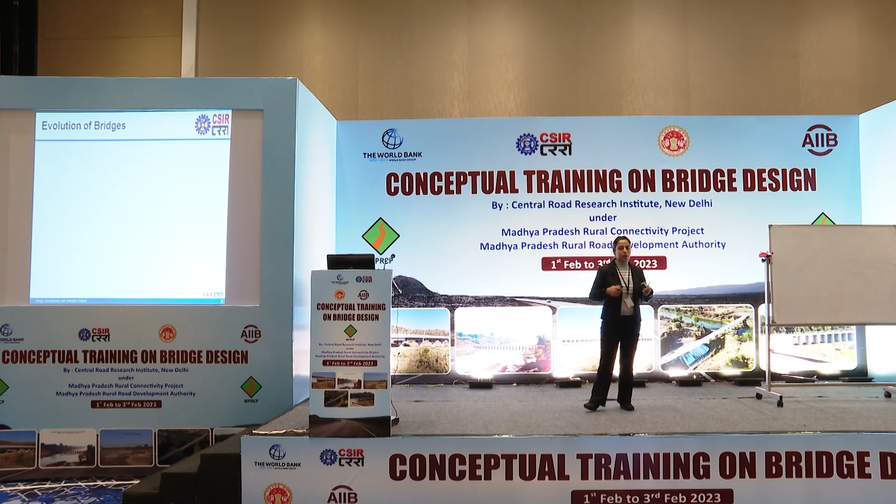So we'll keep this session very interactive so that everybody can participate, because दो reasons हैं, topic भी बहुत easy है और इसमें बहुत सारा information भी नहीं है आपको देने के लिए कि you will get bombarded with so many equations and so much of information. So we'll keep it very interactive, है ना? So anybody?

मतलब ब्रिज एज सच ब्रिज नहीं बोला जाता था, ब्रिज वर्ड ही नहीं एग्जिस्ट करता था। तो व्हाट वाज द फर्स्ट थिंग विच माइट हैव एक्साइटेड द मैनकाइंड टू बिल्ड समथिंग लाइक अ ब्रिज?

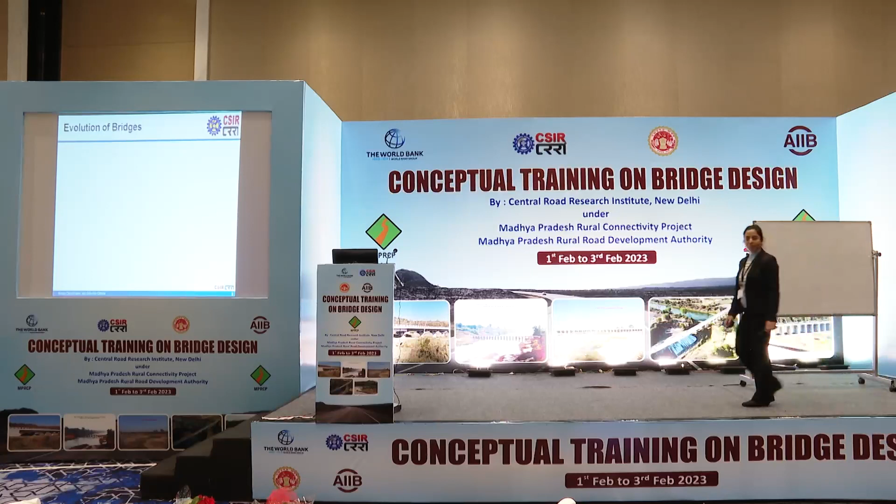हाँ, दैट इज द थिंग, बट क्या देख के उसे आइडिया आया कि ओके लेट्स मेक अ ब्रिज? क्या क्या देख के कुछ आइडिया आया कि एक ब्रिज बनाते हैं? ऐसे वाइल्ड गेस कुछ भी?

हाँ, एग्जैक्टली, सो एग्जैक्टली दैट वाज द फर्स्ट थिंग। एक ट्री, प्लैंक या कोई लकड़ी पानी के ऊपर गिर जाता है या कुछ ऑब्स्टिकल के ऊपर गिरा है और दैट माइट हैव एक्साइटेड द मैनकाइंड और मे बी just to build something like a bridge, है ना? और natural bridges, rock के bridges जो कि self made थे, naturally built थे, उन्होंने भी they might have also contributed and motivated to build something like bridges, what we call today bridges.

अच्छा, अभी एक छोटा प्लांक था और अगर हमें उसका कैरेज वे, उसका विड्थ इंक्रीज करना है तो they might have thought कि चलो ज़्यादा प्लैंक्स लगा देंगे, हमारा कैरेज विड्थ बढ़ जाएगा। इवन मोर हाउ कि प्लैंक को फ्लैट कर देते हैं, चलने में इजी रहेगा। स्लोली स्लोली थिंग्स वर इवॉल्विंग एंड देन स्टार्टेड एक्चुअली द ब्रिजेस विच वी नाउ सी।

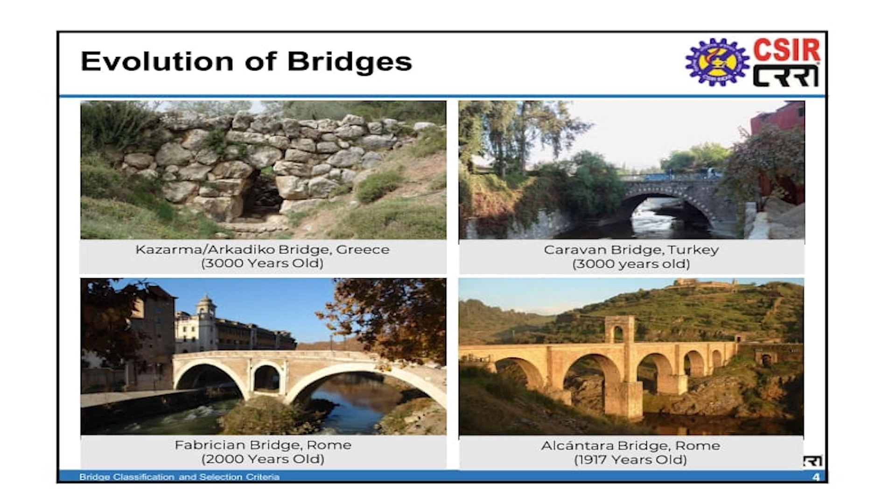ये ब्रिज है Arkadiko ब्रिज विच इज़ इन ग्रीस। ये माना जाता है कि गिनीज बुक ऑफ वर्ल्ड रिकॉर्ड में है कि ये 3000 ईयर्स ओल्ड ब्रिज है जो कि आज भी एग्जिस्ट करता है और पेडेस्ट्रियन के लिए ये यूज़ किया जा रहा है। उसके बाद एक अनदर ब्रिज है टर्की में, कैरावन ब्रिज, दैट इज़ ऑल्सो क्लेम्ड टू बी 3000 ईयर्स ओल्ड।

रोम के इंजीनियर्स थे, दे आर टिल डेट एंशियंट टाइम्स में जो उन्होंने ब्रिजेस बनाए हैं उनके वो इंजीनियर्स आज भी माने जाते हैं। अपने ब्रिजेस जो भी उन्होंने उस टाइम में कंस्ट्रक्ट किए थे, आज भी उनमें से कुछ ब्रिजेस एग्जिस्ट कर रहे हैं एंड दे आर स्टिल इन यूज़।

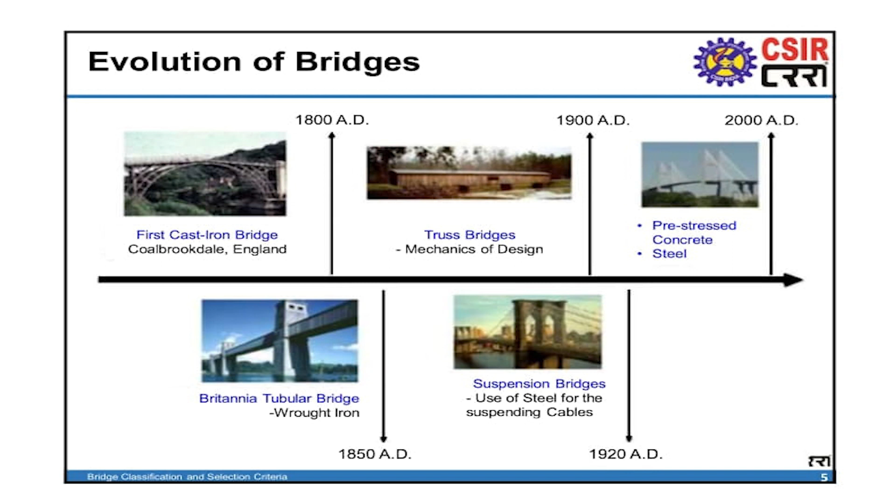देन टिल 1800 पहली बार फर्स्ट कास्ट आयरन ब्रिज बनाया गया इंग्लैंड में और उसके बाद रॉट आयरन ट्यूबुलर ब्रिज इन 1850 बनाया गया और ट्रस ब्रिजेस ड्यू टू मैकेनिक्स ऑफ डिज़ाइन ये जब डेवलप हुआ तो हमें समझ आया कि हम आयरन जो हमें रॉड्स या मेंबर्स मिल रहे हैं उनको एक पर्टिकुलर कॉन्फ़िगरेशन में लगाएंगे तो हमें बेटर स्ट्रक्चरल डिज़ाइन प्रॉपर्टीज़ मिलेंगी। तो उस तरह से ट्रस ब्रिजेस केम इनटू एग्जिस्टेंस। And then suspension bridges.

Suspension bridges also they came up in 1920 AD. So here they started the use of steel for suspending cables. So that's totally a different kind of way where we are using a material in a different way so that we can go for even longer and longer spans.

Pre-stressed concrete और steel उसके बाद आया।

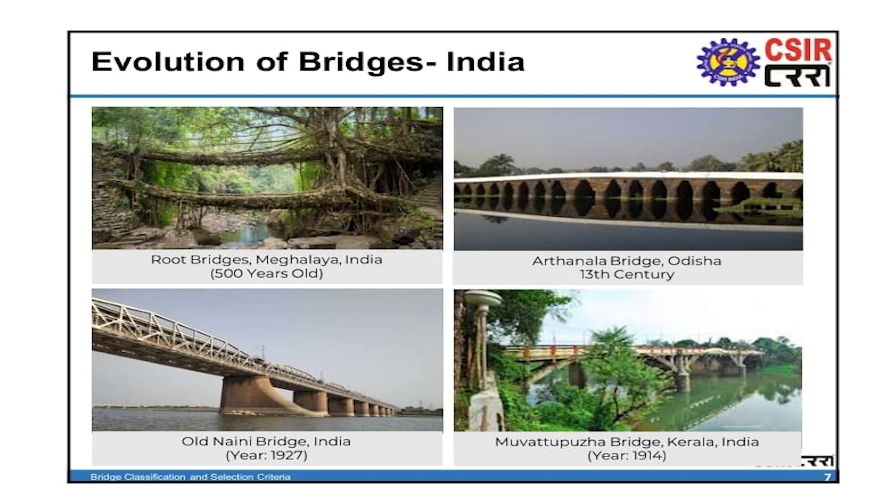India में अगर specifically बात करें तो root bridges in Meghalaya ये माने जाते हैं करीब 500 years old. आज की date में भी कुछ tribes ऐसे हैं जो इन्हें preserve करने की कोशिश कर रहे हैं और अभी भी इन्हें build कर रहे हैं, क्योंकि एक bridge बनाने में तकरीबन 100 years complete लग जाते हैं, लेकिन इसकी life बहुत ज़्यादा होती है।

Of course some people also argue whether we can call them a bridge or not, but yes, we do call them. Arthanala Bridge in Odisha was built in the 13th century. Naini Bridge was built in 1927, and in Kerala, Muvattupuzha Bridge in India was built in 1914 - the first concrete bridge.

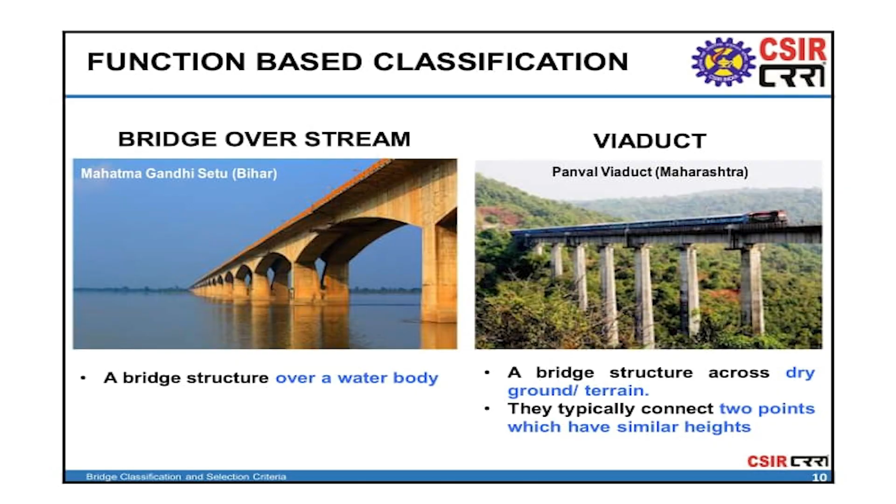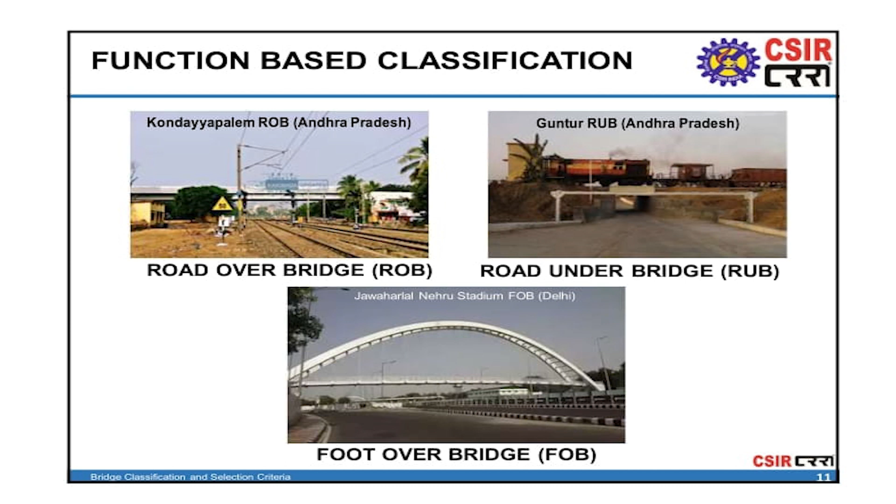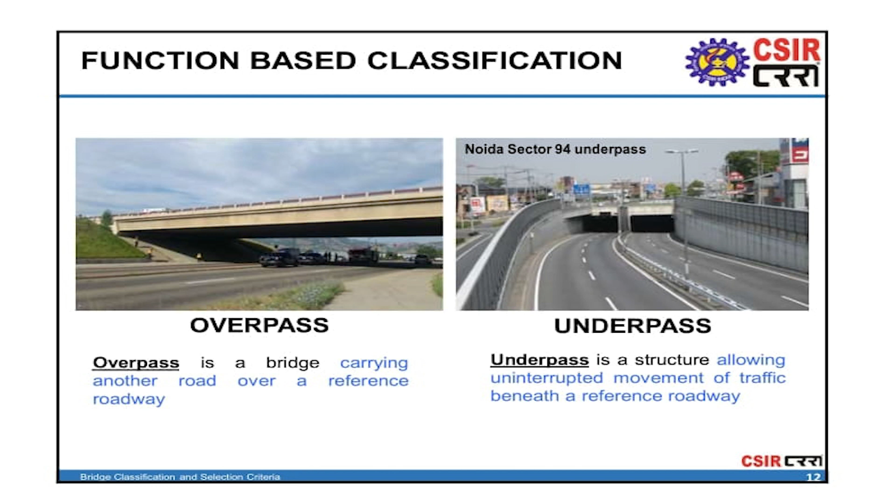Foot-over bridge we all know for pedestrian use. Overpass, if we are building a road to cross a reference road, that's overpass, and underpass is going under the reference road. Flyover, as the name suggests, we are actually flying over the traffic to increase the speed.

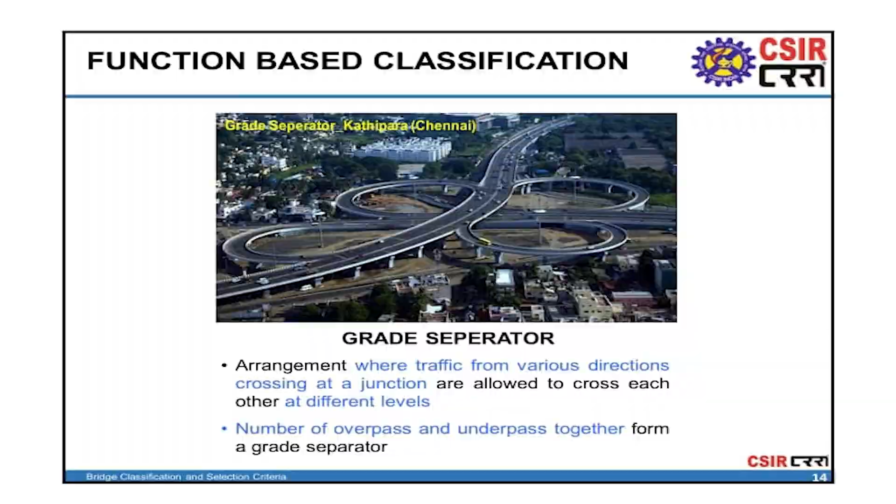Or maybe without traffic light, if we wish to go something like that, so flyovers. Subway, to cross a particular road under the road, beneath its reference road, subway. Grade separators - this helps us in making some kind of arrangement which is a combination of different overpasses and underpasses where the traffic is moving at different levels. So that's the grade separator.

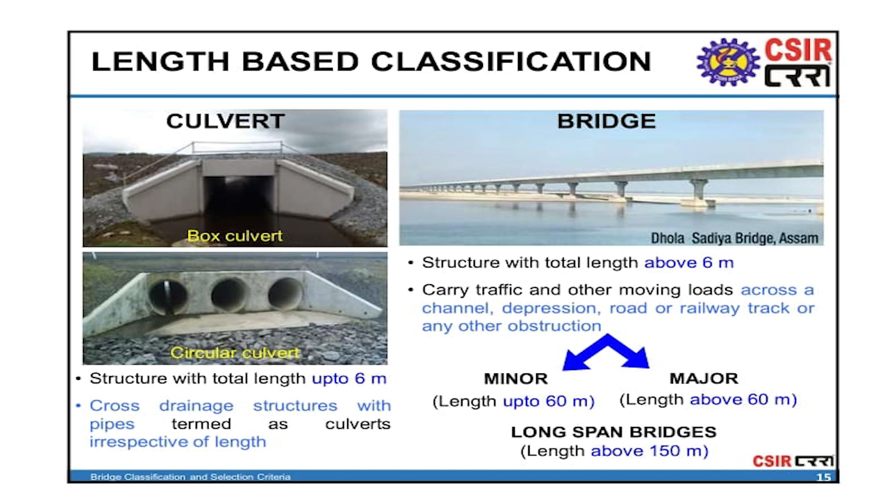Solid slab जब हमारा span छोटा रहता है, then this is actually the simplest form of bridges जिसमें formwork भी बहुत easy है, reinforcement detailing भी बहुत easy है। So this is the easiest bridge type which we generally go for if the span is small।

लेकिन जैसे जैसे span आपका increase करता है, एक solid slab देना uneconomical हो जाता है, क्योंकि उसकी slab की जो depth है it will be too much, तो हमारा dead weight बहुत increase कर जाएगा। उस case में we sometimes go for voided slab bridges।

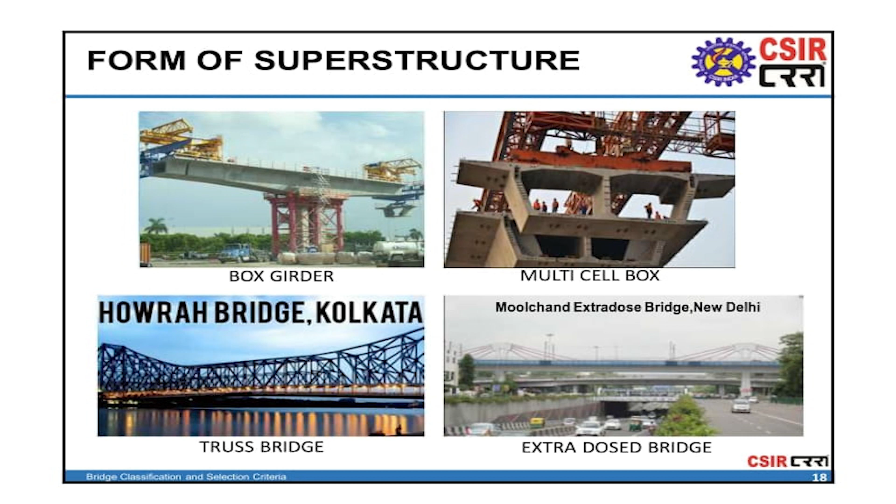इसमें जो आपको केबल्स दिखाई दे रहे हैं, ये एज सच केबल स्टेड वाले केबल्स नहीं हैं। सो ये जो आपके केबल्स हैं, they are actually the pre-stressed cables which are coming out of the deck and going to the pylon. Okay, next classification is based on the support of the superstructure.

Simply supported, जिसमें दो स्पैन्स का एज सच कोई रिलेशन नहीं है, they are connected with an expansion joint. Then the continuous bridges, जिसमें हमारे 2 या 3 स्पैन्स पे पूरा स्पैन रन करता है विदाउट एनी एक्सपेंशन जॉइंट, maybe after 2 to 3 spans it will come.

फिर इंटेग्रल ब्रिजेस, आजकल ये भी रिलेटिवली नया टाइप ऑफ ब्रिजेस हैं जो एक्चुअली वेरी लो ऑन मेंटेनेंस हैं। मैं कहूंगा मेंटेनेंस की अगर हम बात करें तो सबसे ज़्यादा ब्रिजेस के अंदर कॉस्ट आता है एक्सपेंशन जॉइंट्स की मेंटेनेंस और बेयरिंग्स का मेंटेनेंस।

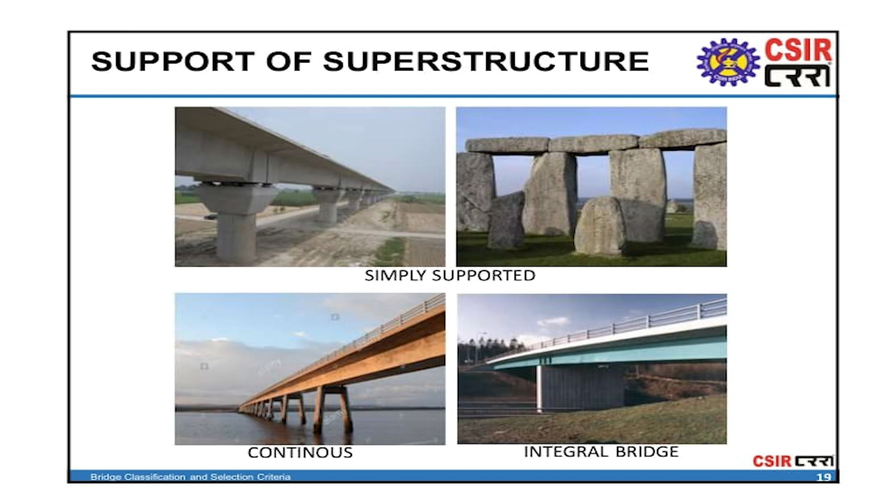अगर आप सिंपली सपोर्टेड ब्रिजेस में जाते हो तो आपके बेयरिंग्स हैं, एक्सपेंशन जॉइंट्स दोनों हैं। कॉन्टिन्यूस ब्रिजेस में जाते हो, कंपैरेटिवली उससे कम है। बट इंटेग्रल ब्रिजेस इसलिए आजकल फेमस हो रहे हैं क्योंकि इसके जो जॉइंट्स हैं, वो अबटमेंट एट वन एंड ओनली हैं। It is continuous throughout the length of the bridge.

Now how is temperature taken care of? That's actually temperature effects are taken care by the last joint which is at the abutment end.

Support of the superstructure: so cable supported, under which cable stayed and suspension bridges come. This we have covered. Then balanced cantilever.

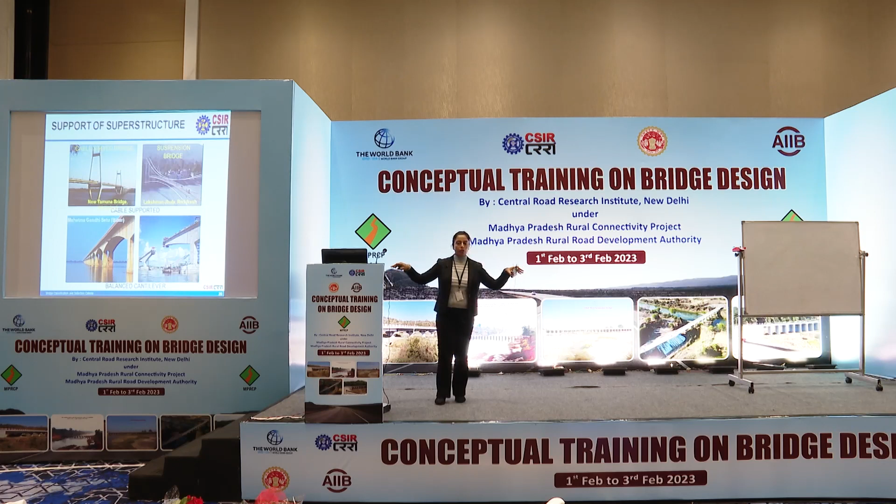बैलेंस कैंटिलीवर सपोर्ट सिस्टम में इसका कंस्ट्रक्शन बड़ा ड्रामेटिक कंस्ट्रक्शन होता है। So what we do in this kind of bridge is that first the pier is casted and then the arms of the span are casted towards each other. So slowly the two arms of the one pier, actually the cantilever arms, they balance out each other. So one by one, and then they join in the mid of the span.

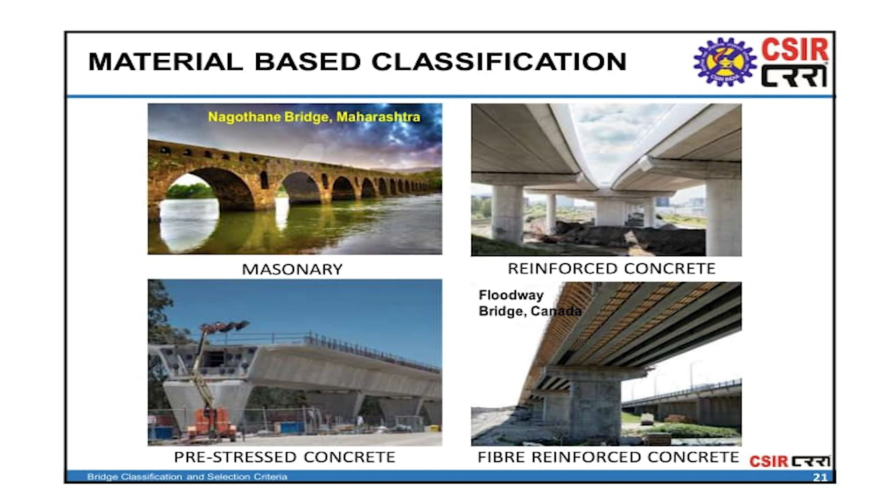Material based classification: masonry bridges, बहुत सारे हेरिटेज ब्रिजेस जो हमारे हैं वो लार्जली मेसनरी ही हैं। Then reinforced, very common type of material used for the bridges, and pre-stressed concrete bridges, ये भी बहुत आजकल कॉमन ही हैं, I would say.

Then fiber reinforced concrete bridges have also come up, though not in India, but there is an example, floodway bridge in Canada, which has used only GFRP, glass fiber reinforcement, above the girder levels. So in girders, the steel is reinforcement only, steel reinforcement, but above the girder, slab or whatever members of concrete are there, they are using a GFRP.

Then steel in the truss bridges and composite bridges, जिसमें हमारे girders will be of steel and deck slab of concrete. Timber bridges अभी आजकल बहुत common नहीं हैं।

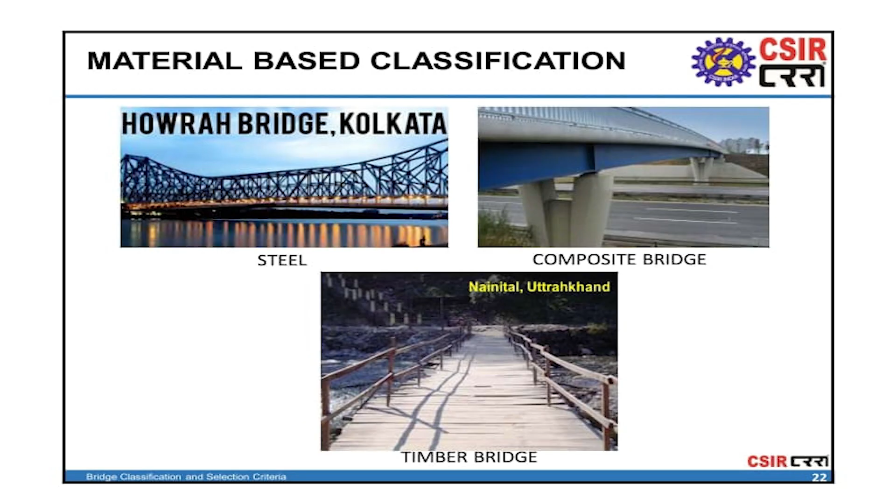Segmental construction technology, this is very common because it is easy and economical. ये वीडियो है टू शो यू इंक्रीमेंटल कंस्ट्रक्शन।

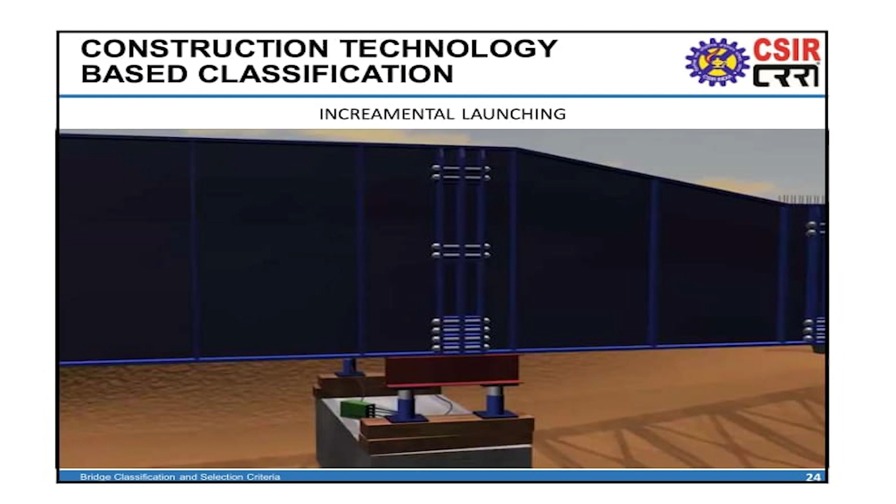Okay, anyways, I'll maybe show you later if we have time.

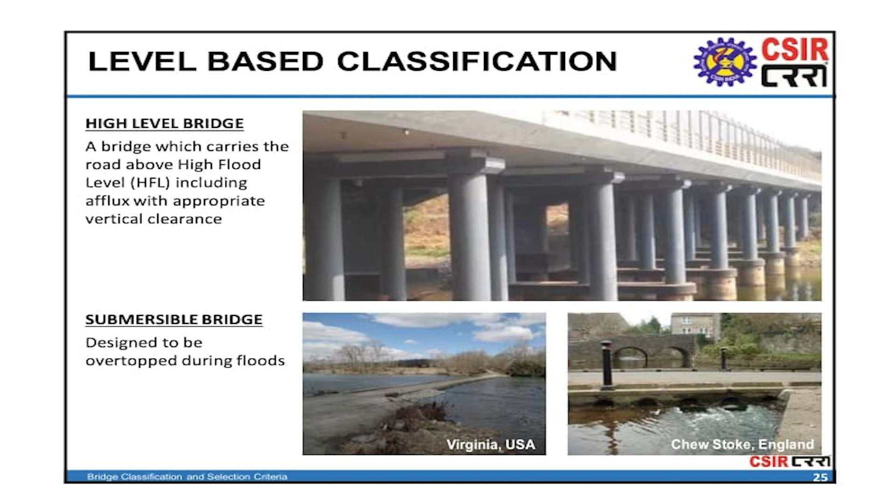Level based classification. I think since morning we are having doubts related to hydraulics, HFL, hydrology. This is a type of bridge which I believe you all are very much interested in. High level bridges are where the road level is supposed to be above the HFL level, and submersible bridges are where the road is supposed to get submerged in water if there are a lot of floods. Overtopping during the flood is allowed in these types of bridges.

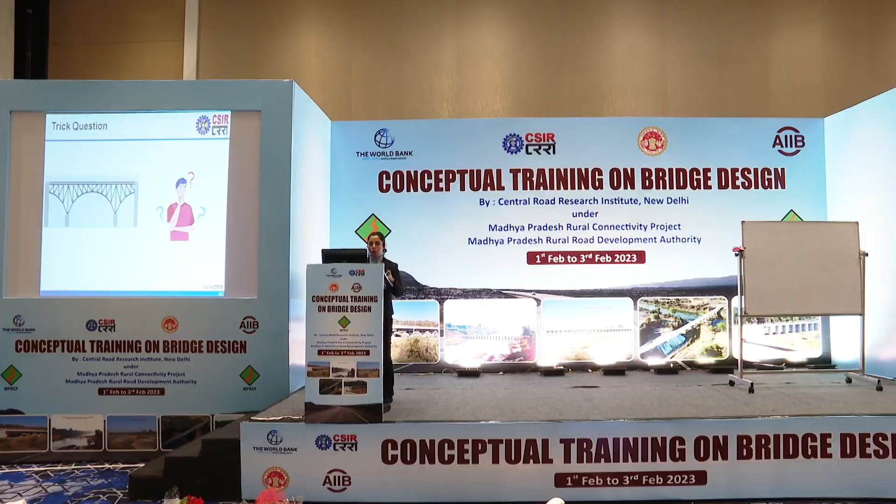Okay, now we have covered the classification. It's a very small trick question for all of you. What do you think this type of bridge is?

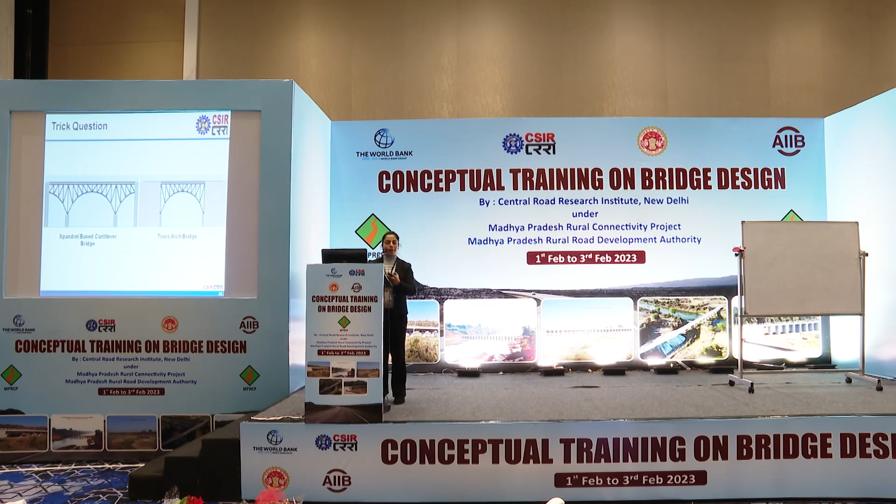Okay, selection criteria. I would start and also end with this same statement, that there are so many factors. Yeah.

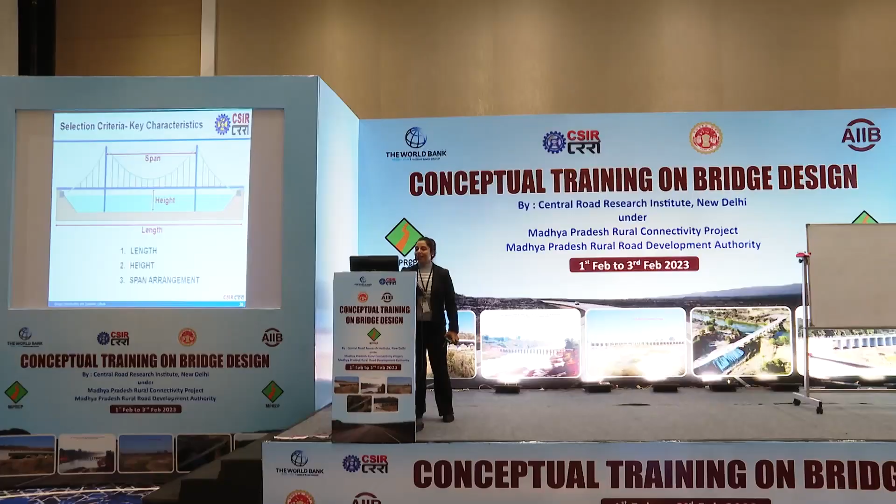In selection criteria there are actually so many different factors which end up deciding what type of particular bridge we should be choosing. In this lecture we will be covering all those factors which I could cover and explain to you. But at the end of the day, again, you will find that there are so many factors - there is no pinpoint answer for selecting a particular bridge.

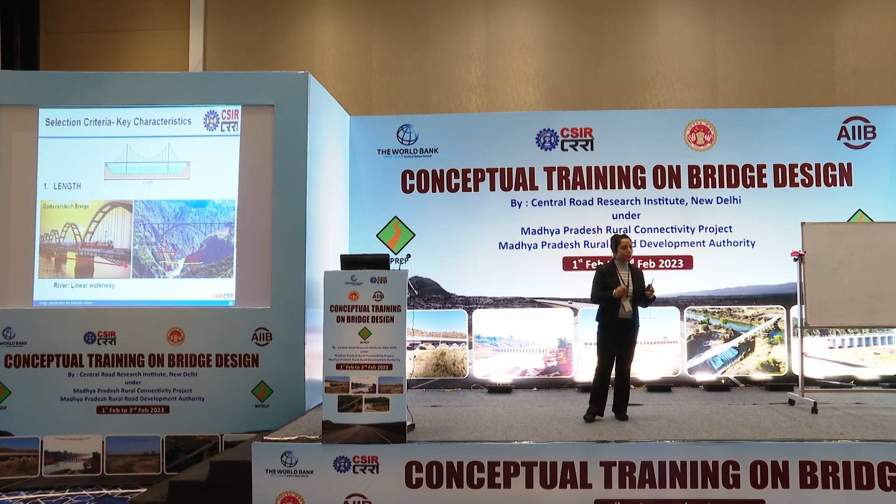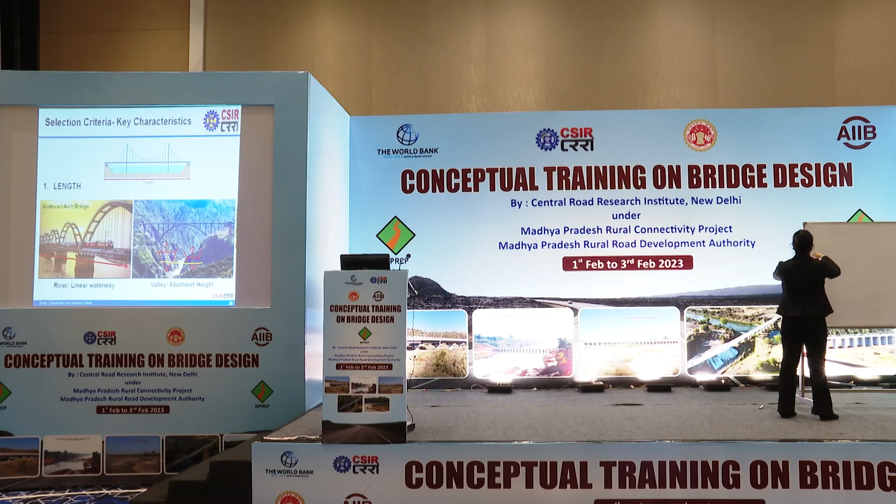हमें फाउंडेशन यहाँ पे रखनी है, ये हमने फिक्स कर दिया बेस्ड अपॉन सम स्टडीज़। ये डिसाइडेड है कि फाउंडेशन यहाँ रखी जाएगी। तो मुझे ब्रिज यहाँ रखना चाहिए या यहाँ? ऑन व्हाट बेसिस वी विल डिसाइड द लेंथ ऑफ द ब्रिज? वेयर विल वी व्हाट? एग्जैक्टली, सो दिस इज द अबटमेंट हाइट।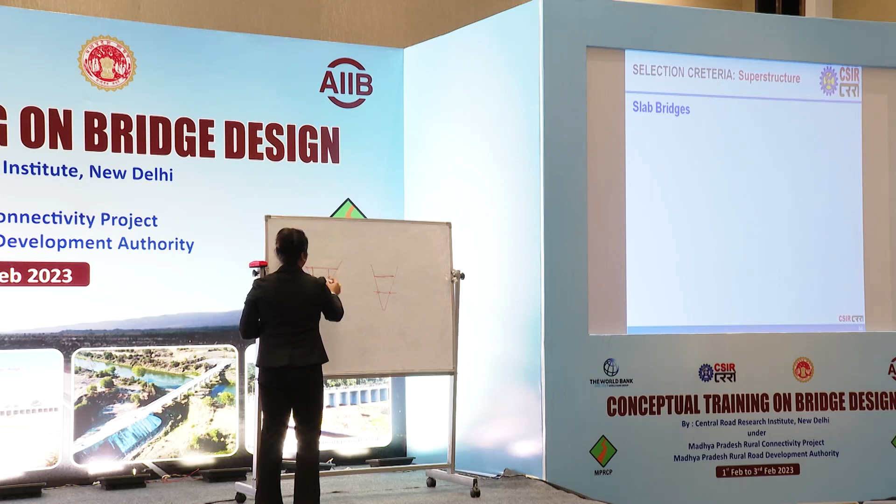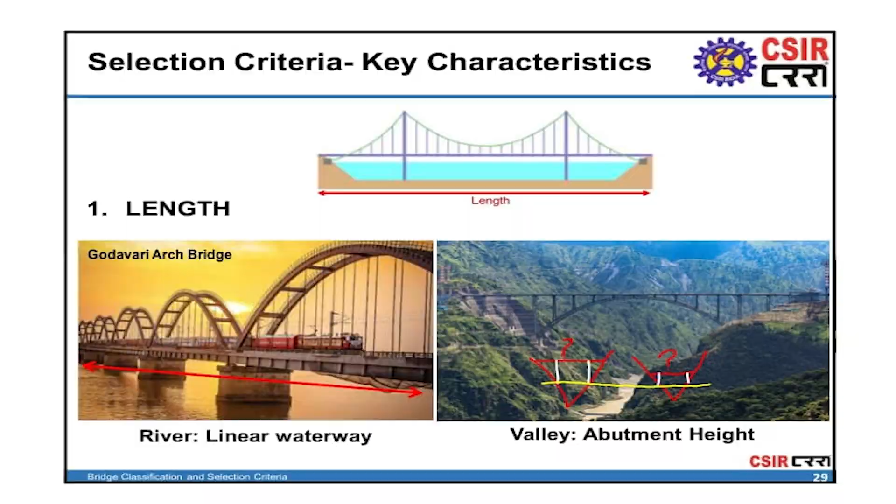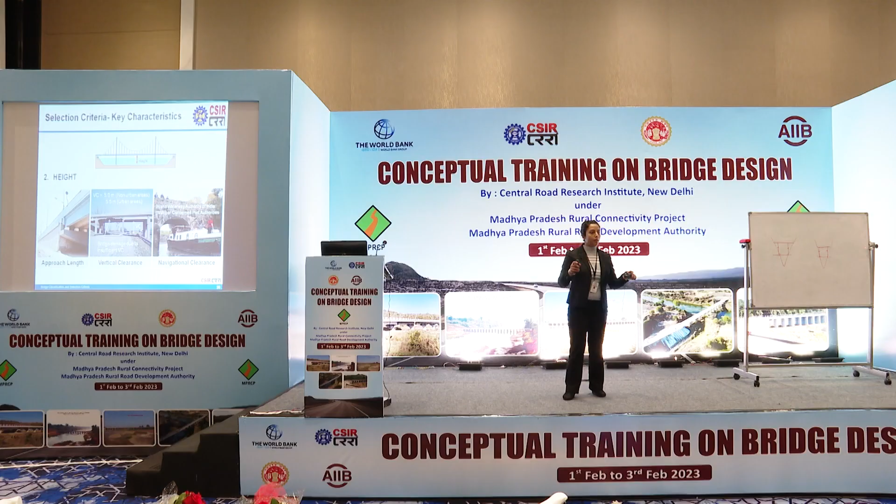So we have to ensure that this abutment height should be minimum. ठीक है, abutment height के basis पे decide होगा, minimum abutment height रखनी है। Height of the bridge decide करने के लिए हमें उसकी approach length के basis पे depend करेगा, क्योंकि हमें अप्रोच लेंथ का स्लोप एक पर्टिकुलर रेशियो, एक पर्टिकुलर वैल्यू रखना है एज पर द कोडल प्रोविजन। सो अकॉर्डिंगली डिसाइड द हाइट ऑफ द ब्रिज फॉर द फ्लाईओवर्स। वर्टिकल क्लियरेंस और द नेविगेशनल क्लियरेंस के बेसिस पे हाइट ऑफ द ब्रिज डिसाइड होगा।

स्पैन अरेंजमेंट - सुबह हम डिस्कस कर रहे थे स्मॉलर स्पैन और लार्जर स्पैन। हाउ विल वी डिसाइड दैट? अगर आपके पास ऑप्शन है बहुत सारे छोटे छोटे स्पैन्स बनाना या एक लंबा स्पैन बनाना, व्हाट विल बी द डिसाइडिंग फैक्टर फॉर दैट? इकोनॉमी इज ऑलवेज देयर, एंड ऑफ द डे इट्स ऑल मनी। कॉस्ट ऑफ द ब्रिज टेक्निकली।

Why would you go for a longer span? Yeah, these are all contributing factors. You are correct. But... I mean, any other? Okay, so everybody wants to go for longer span.

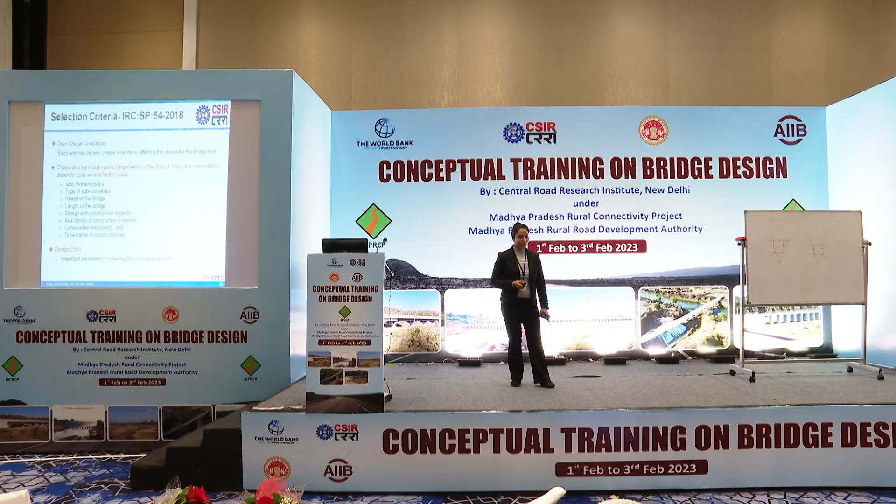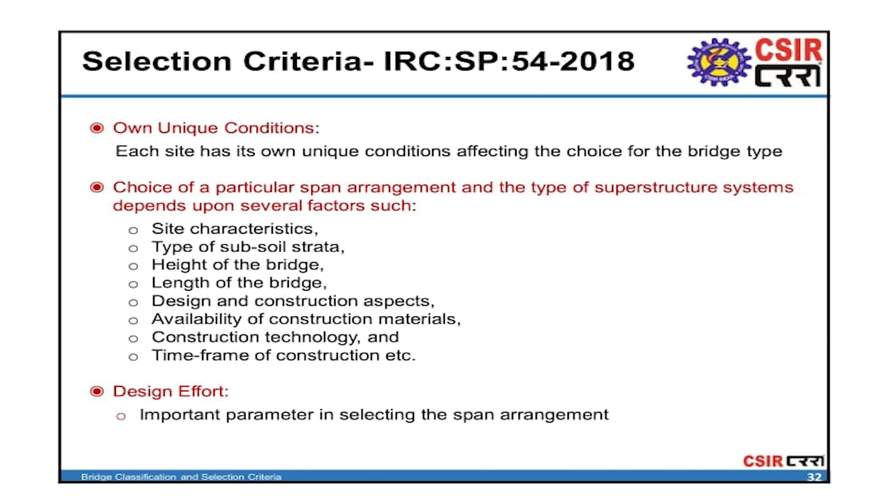IRC codes have very clearly mentioned that every bridge has its unique properties, unique conditions. So the type of bridge we should be selecting is based on that particular unique condition. So this question will always be there, what type of bridge we should be choosing. But in this lecture, we will be covering different factors so that everybody understands, and then availability of construction material, technology, and time frame of construction. So design effort is also an important factor to decide the type of the bridge. Sometimes it happens that somebody is more comfortable in a particular type of bridge, then they keep on suggesting that particular type instead of trying or iterating for even more types of bridges, which may be economical.

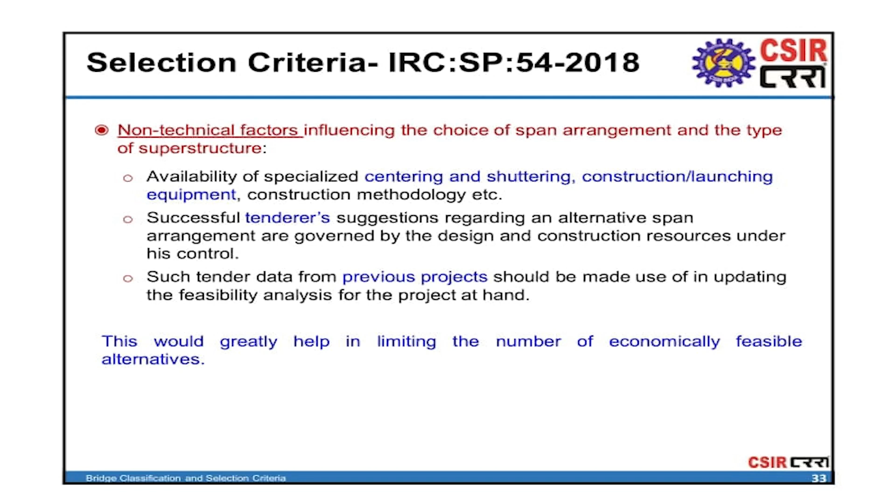Some non-technical factors are also mentioned in the code, including the construction technology which is available with the vendors who are going to construct it. Sometimes it happens that one particular type of bridge is suggested and the vendor is having different construction technology, shuttering, all those things. So at the end of the day, they'll change it accordingly. So it's suggested that you go for a survey, decide, and limit the number of type of bridges to have economical feasibility alternatives.

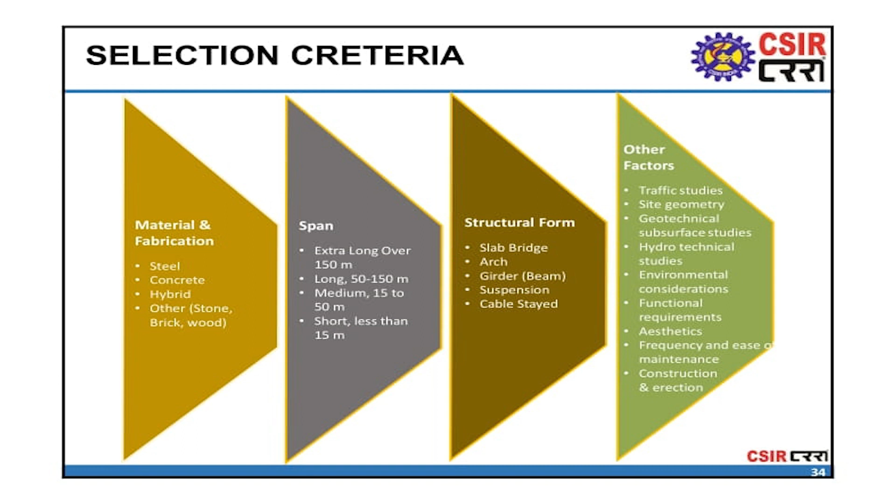Okay, so now let's dive down into the different factors which we have been discussing about. Different type of factors are material of construction, span, structural form, and some other factors. So we will cover all these pillars one by one.

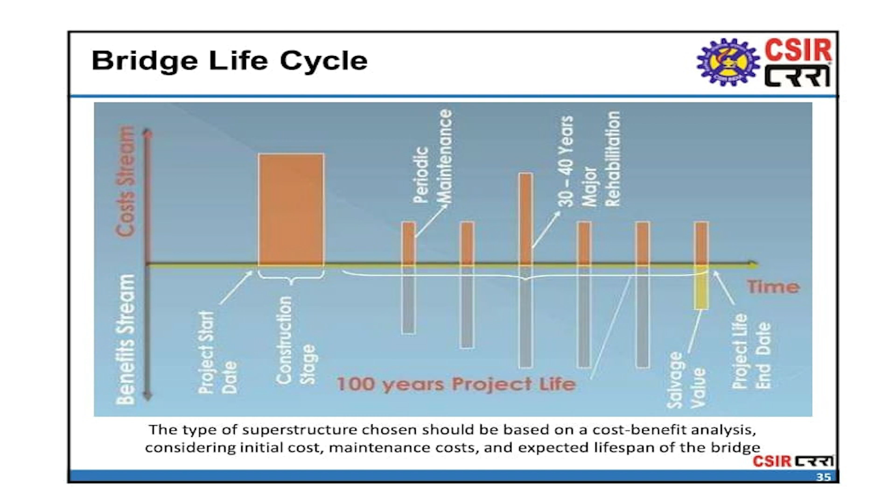Before that, bridge life cycle is something I would like to talk about a little bit. So end of the day, like I said, it's all economy. Cost of the bridge should be minimum. So here the cost is bridge life cycle cost. So whenever we are going for a particular type of bridge, the aim is to minimize the bridge life cycle cost.

Initially when we are just constructing the bridge, there is only cost associated with it, no benefit. After some time, once the bridge is ready, it will start giving benefits, so you can see benefits coming up, but there is a cost of periodic maintenance as well. After some time, the benefits will slowly increase, and there is a consistent cost of periodic maintenance associated with it. After 30 to 40 years, there is a major rehabilitation cost which we might have to do for the bridge.

After the design life, like we said, 100 years of the bridge, it will be having just its salvage value and cost for its maintenance. If it is built nicely and properly, it may keep on giving benefits later also, but this is just to show you how the life cycle cost can be explained for a bridge.

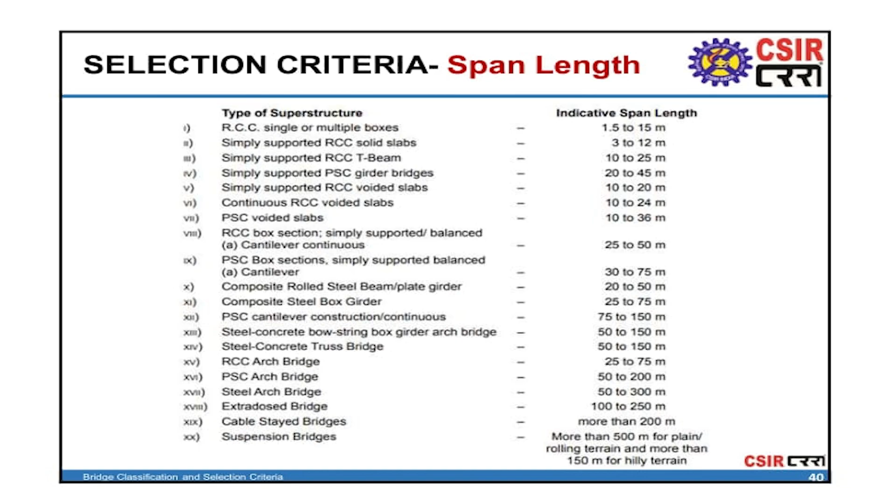Span - I believe span is the first criteria to choose the type of superstructure. So we should be having some figures in our mind for a particular span, indicating which type of bridge is suitable.

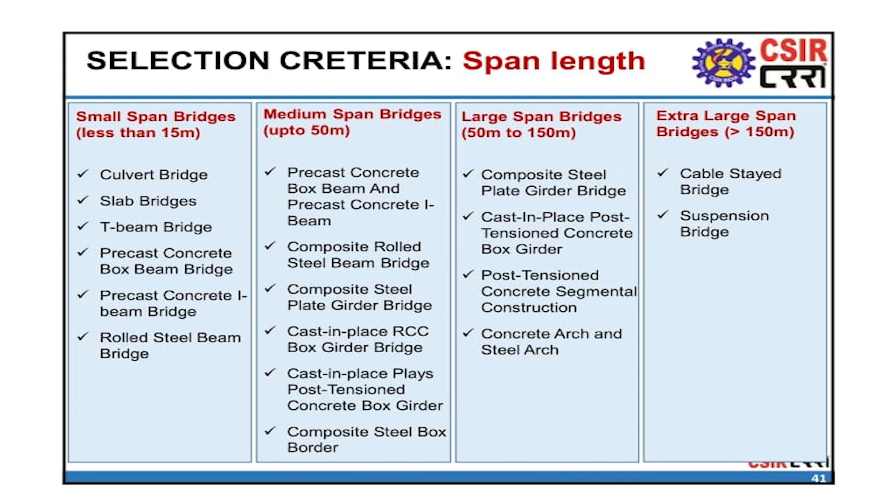For small spans, less than 15 meters, go for culverts, slab bridges, T-beam, precast concrete box, precast concrete I-beam, or rolled steel beam. For medium spans, 15 to 50 meters, precast concrete box, composite rolled steel beam, composite steel plate girder, cast in place RCC, cast in place post tensioned - the full list will be shared in this presentation.

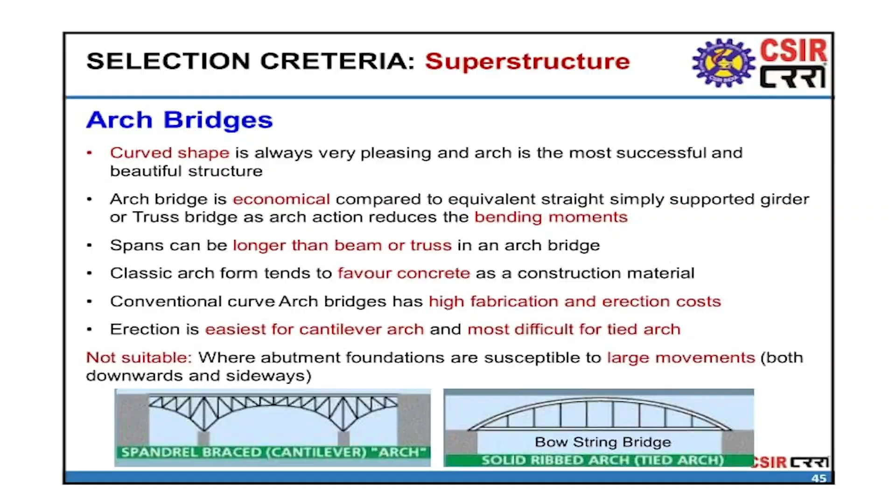Because while we are constructing the arch, we have to maintain the arch action. Erection is easiest for the cantilever arch and most difficult for the tied arch. It is not suitable when the abutment foundations are susceptible to large movements, because the arch is going to give inclined thrusts on the substructure.

So if the foundation is having large movements, then it is not suitable.

In case of truss bridges, since it is built up with smaller elements which can be joined together at the site itself, it is easy to transport.

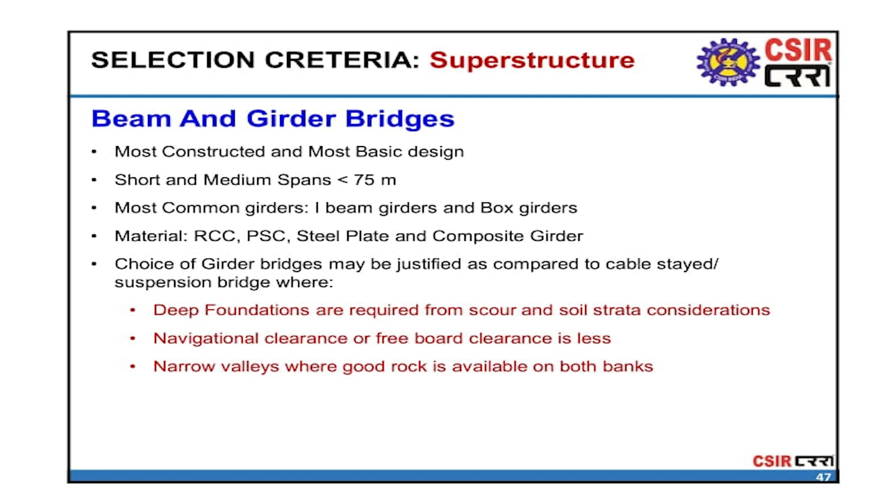Now, if we are comparing whether we should go for a cable stayed, a suspension bridge, or a girder bridge, these are the three factors based on which we can decide. If deep foundations are required, I girders can be selected. If navigational clearance and freeboard clearance are low, then we will select girder bridges. And for narrow valleys where good rock is available on both banks, go for girder bridges.

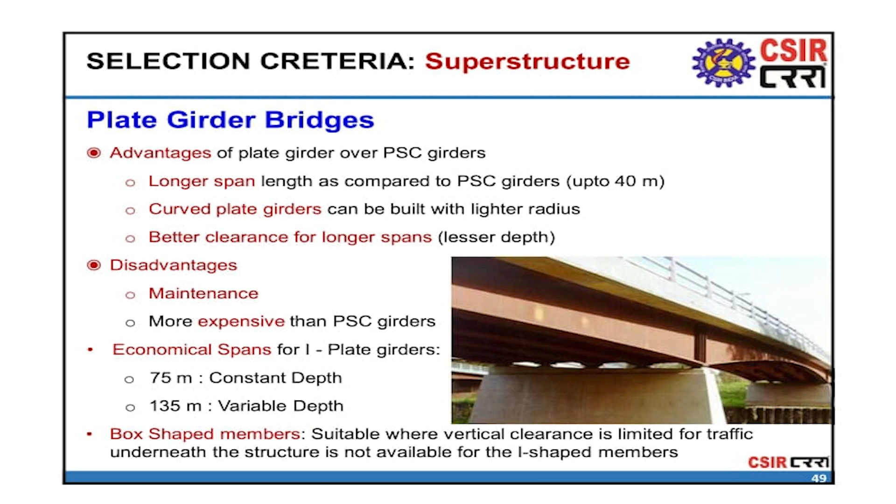Plate girders, where the girder is actually of steel. What are the advantages of plate girders? So somebody was asking this question in the morning - when do we select a composite bridge? There is an option of going for a longer span in the case of composite bridges.

Curved plate girders - comparatively, if you compare it with concrete I girders, you can go for curved plate girders, because the curve is possible in case of steel. Better clearance for longer spans, because you will have less depth. For a particular span, if you compare these concrete girders with plate girders, you will have lesser depth, so more clearance. So these are the advantages.

Then disadvantages - maintenance cost is associated with this because of corrosion, so you need to paint them regularly to maintain them, and they are more expensive in comparison to PSC girders. Economical spans for I-plate girders: for a constant depth, we can go up to 75 meters, and for variable depth, 135 meters.

Suspension bridges are very elegant, very beautiful bridges. If we have to go for a span of more than 600 meters, we don't have any other option. That's the only option we have.

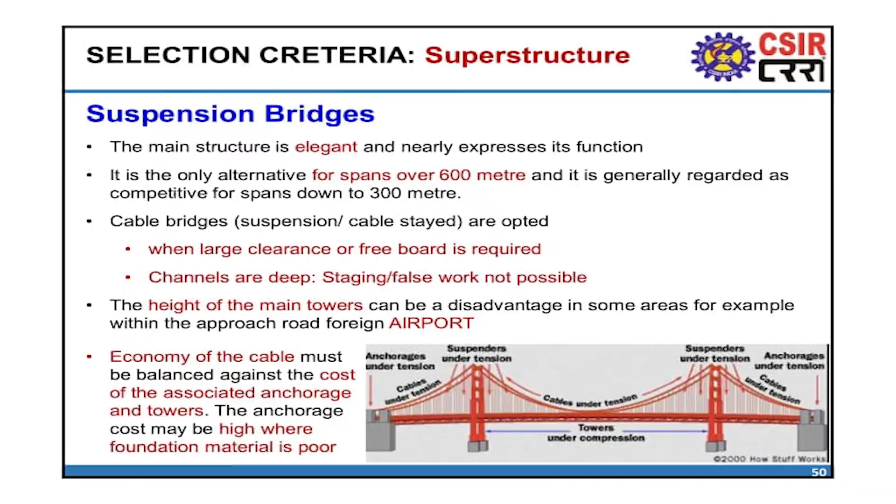When we talk about cable bridges, including both cable stayed and suspension bridges, these are opted when large clearance and freeboard are required, and when the channel is deep. In such cases, when staging and false work cannot be done, we go for cable bridges.

But sometimes the height of the main tower becomes a disadvantage for this kind of bridge. If such a bridge is built in areas where an airport is nearby, the height of the tower can be a disadvantage.

Cable stayed bridges are economical for spans of 100 to 350 meters. They are less costly than suspension bridges and can be quickly constructed in comparison. Compared to suspension bridges, they have straight cables, so they have more stiffness and better strength. High strength cables in tension lead to economy in material, weight and cost.

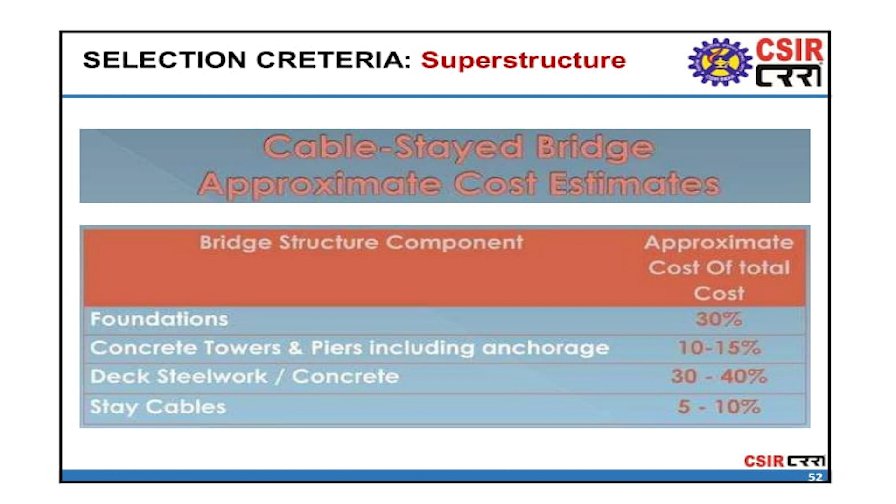This is a very approximate cost associated with construction of cable stayed bridges. Foundation roughly costs around 30%, concrete towers around 10 to 15%, deck (steelwork or concrete, including everything) 30 to 40%, and stay cables around 5 to 10%. This is just a very approximate idea.

So the last factor is other factors. There are many other factors as well, starting with traffic studies.

In the morning session where DPR was discussed, it was mentioned that traffic studies are done first to decide whether we need a bridge at all or not. So first the traffic study is done to examine its economy.

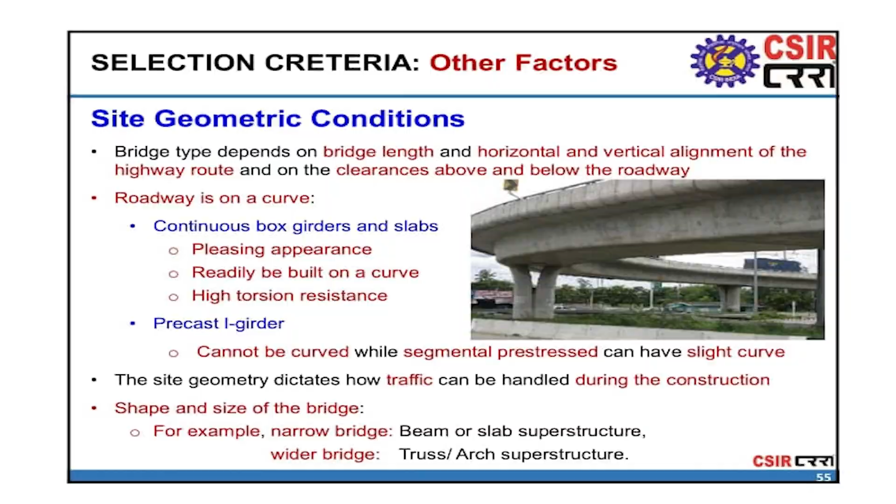Continuous box girders, rightly said. First, they have a pleasing appearance and can be readily built, and they have high torsional resistance.

Precast I-girders we will not select because a curve cannot be given to them, but if you go for segmental precast, a little bit of curve can be given. But of course that's not a very good choice, I would say.

Site geometry also dictates how traffic can be handled during construction, because how you handle traffic during construction time is a very important factor too. When we talk about quick construction, in many congested areas we end up having only a few options that allow for quick construction. So in this way, site geometry also plays an important role.

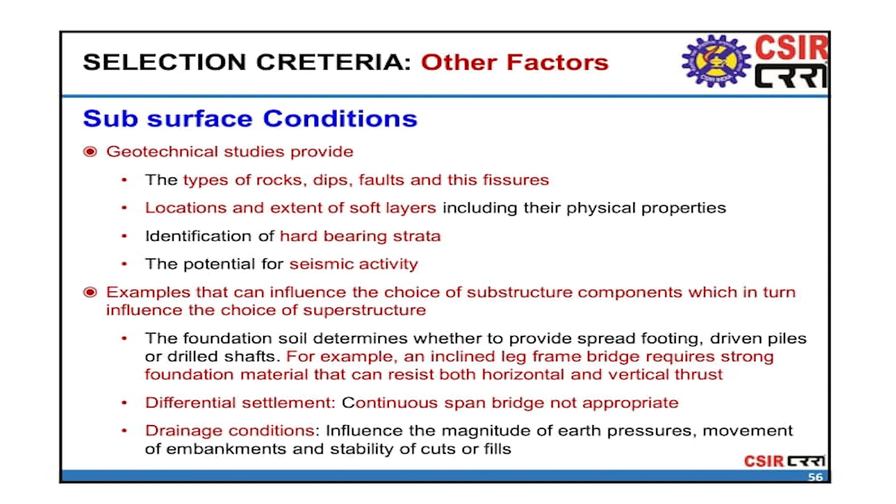Subsurface conditions and geotechnical studies are also important, because ultimately your bridge will be on a foundation. So what type of subsurface conditions are available at that particular site also has to be thoroughly studied, and geotechnical studies need to be done.

For example, अगर आपको एक inclined leg frame bridge देना है, तो unless you have your geotechnical study data with you, because उसमें inclined leg है तो दोनों horizontal and vertical component of the forces will be coming. So this condition, the soil strata which is available where the foundation is gonna come, that should be able to take both the components of the force.

डिफरेंशियल सेटलमेंट, अगर वहाँ जो स्टडीज़ में हमने देखा कि वहाँ पे डिफरेंशियल सेटलमेंट हो सकती है, इस टाइप का स्ट्रेटा है, तो कॉन्टिन्यूस स्पैन ब्रिजेस आर नॉट अप्रोप्रिएट.

ड्रेनेज कंडीशंस भी बहुत इंपॉर्टेंट है हमें फॉर द RE walls and all those things. We need to know the drainage conditions as well.

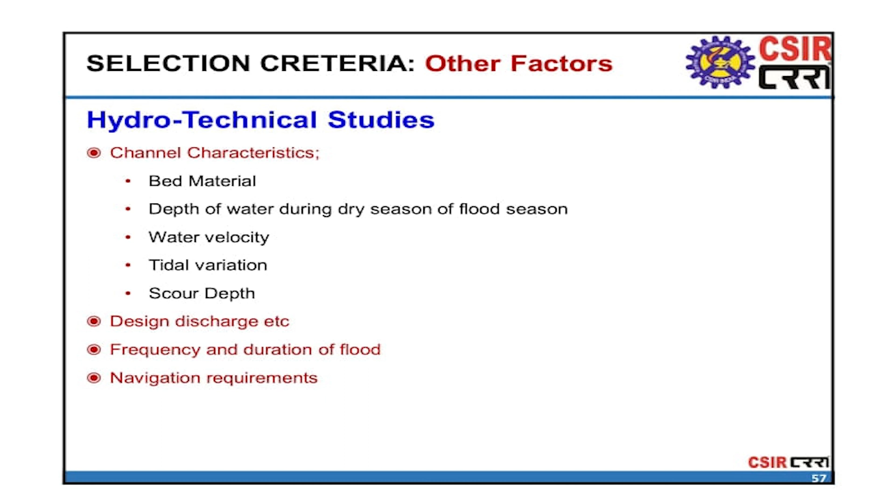Hydrotechnical studies, जो हम शायद सुबह से ही डिस्कस कर रहे हैं. ये हाइड्रो टेक्निकल स्टडी डेटा इंक्लूडिंग bed material, scour depth, tidal variation, all these things have to be studied for deciding the type of the bridge.

Environmental characteristics, impact on the marine life, wildlife, riverbed, flora and fauna, all these also have to be taken care of while we are selecting a type of bridge.

For example, like in the morning session, J.K. Goel ji was talking about the impact of building a bridge on the urban development, urban environment. So that also has to be taken care of.

Possible impact on the archaeological sites in the vicinity. अगर उस एरिया में हमारा कोई हिस्टोरिकल बिल्डिंग है तो ऐसा हो सकता है कि वर्टिकल क्लियरेंस के बेसिस पे हमें 5.5 का क्लियरेंस रखना है, हाइट रखनी है ब्रिज की, लेकिन वहाँ पर एक हिस्टोरिकल मॉन्यूमेंट है तो हमें ये भी इंश्योर करना है कि हमारे ब्रिज ने उसकी साइट को ब्लॉक ना कर दिया हो. सो मे बी हमें उसकी ब्रिज की हाइट उस मॉन्यूमेंट की वजह से थोड़ा हाई करनी पड़े, इवन मोर देन द vertical clearance. So all those factors sometimes can play role in selecting different parameters of the bridge.

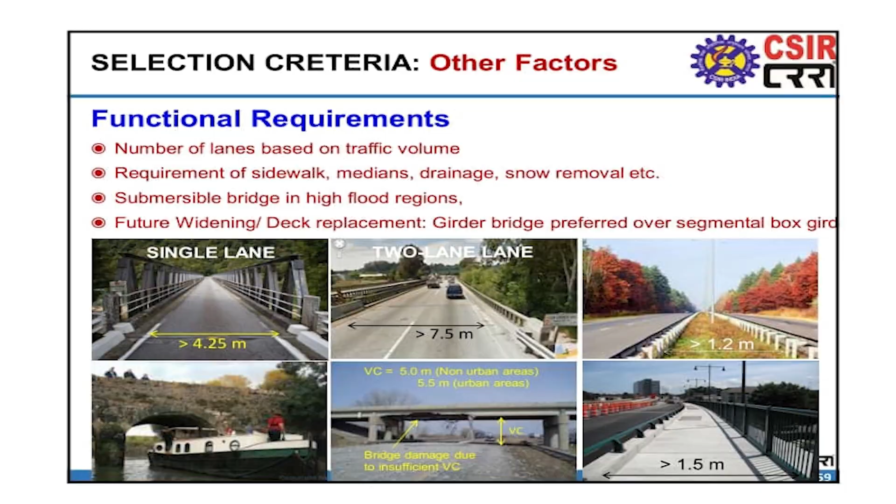Functional requirements, end of the day it should serve the function for which it is built. Number of lanes based on the traffic volume, of course. Requirement of a sidewalk, median, drainage, snow removal, etc. All these kind of things, if they are required in that particular site, then we have to take care of that.

जैसे कि जो हमारी कोडल प्रोविजंस के हिसाब से सिंगल लेन, टू लेन, मीडियन का विड्थ, नेविगेशनल क्लियरेंस की वैल्यूज़, वर्टिकल क्लियरेंस, ये जो मिनिमम क्राइटेरियाज हमारे कोडल प्रोविजन में मेंशन्ड हैं, वी ऑल्सो हैव टू कीप दीज प्रोविजंस इन आर माइंड.

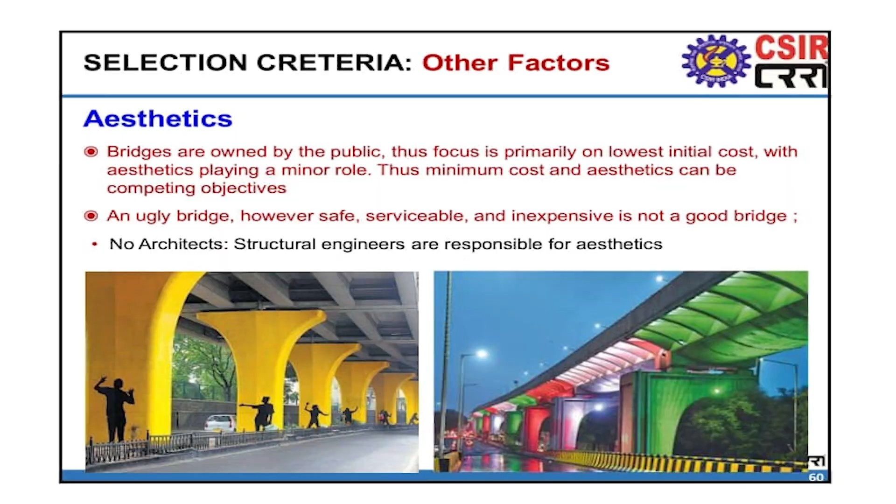Aesthetics. Aesthetics in the bridge earlier was not given much importance. अभी लेकिन IRC 5 कोड का जो 8th रिवीजन 2015 आया है उसमें they have laid a lot of emphasis on the aesthetics of the bridge.

As such हमारे ब्रिज डिज़ाइन में कोई आर्किटेक्ट्स तो नहीं होते हैं, जनरली। मे बी बहुत इंपॉर्टेंट ब्रिजेस लाइक सिग्नेचर ब्रिज, जो अभी दिल्ली का सिग्नेचर ब्रिज है, उसमें थे, बट जनरली दे आर नॉट देयर. तो वी डिज़ाइन इंजीनियर्स आर दी आर्किटेक्ट्स. तो हमें ऐसी अगली ब्रिज भी नहीं बना देनी है, जस्ट बाकी चीज़ों को, फैक्टर्स को देखते हुए हमने एक ब्रिज बना दी, दो इट इज़ सर्विंग ऑल द पर्पस फॉर विच इट वॉज बिल्ड, बट दैट्स जनरली नॉट कंसिडर्ड एज अ गुड टाइप ऑफ सिलेक्शन.

मे बी हम लोग उसको पेंट या कुछ लाइट्स लगा के उसका एस्थेटिक्स इम्प्रूव कर सकते हैं, बट एंड ऑफ द डे यू ऑल्सो हैव टू इंश्योर कि वी शुड नॉट डू टू मच ऑफ इट, क्योंकि पेंटिंग एज सच restricts its maintenance. So we also have to keep in mind, unless it is very much important, don't go for painting the bridge as such.

Frequency and ease of maintenance. Initial cost और maintenance cost को मिला के, like we said, the life cycle cost of the bridge should be minimized.

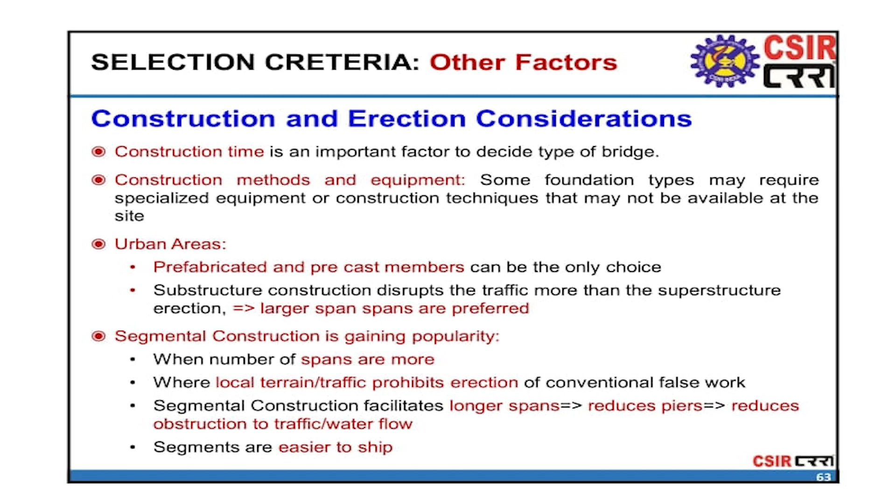Construction and erection considerations: construction time is a very important factor in deciding the type of bridge. Construction methods and equipment available immediately with the agencies who are going to build them also becomes a factor in choosing a particular type of bridge. In urban areas, prefabricated, precast members are a better option because of time constraints.

Segmental construction is preferred because we can achieve more span quickly. When local traffic prohibits the erection of conventional falsework, segmental construction facilitates, allows us to go for longer spans, hence reducing the number of piers and reducing obstruction to the flow of water. And of course, they are easier to ship.

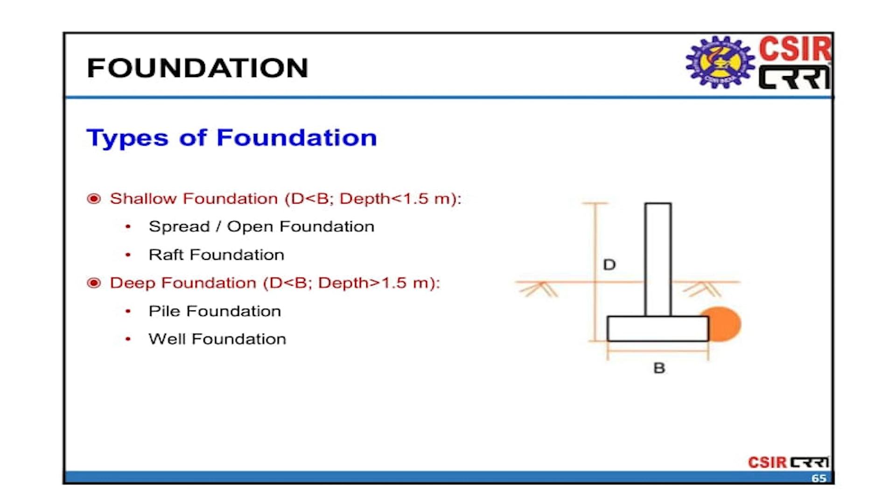Now, the last topic is bridge foundations. There are two types: shallow and deep foundations. Shallow foundation is when the depth of the foundation is less than the width, and deep foundation is when the depth is more than the width.

Spread and raft foundations are two types of shallow foundations, and under deep foundation, the two types are pile and well foundation. So let's talk about spread or open foundations.

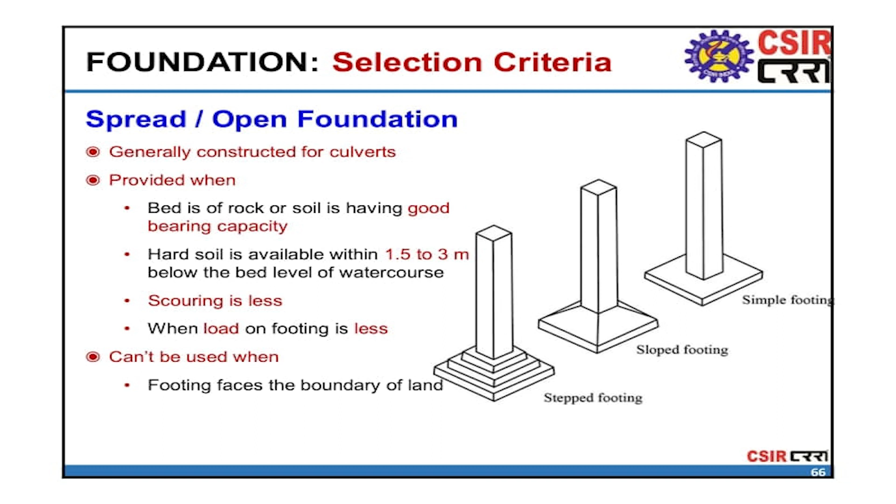It is generally constructed for culverts, when we are having good soil bearing capacity, go for spread foundation. If hard soil is available 1.5 to 3 meters below the bed level, go for this. And when scouring is less, it is a good option to go for open foundation.

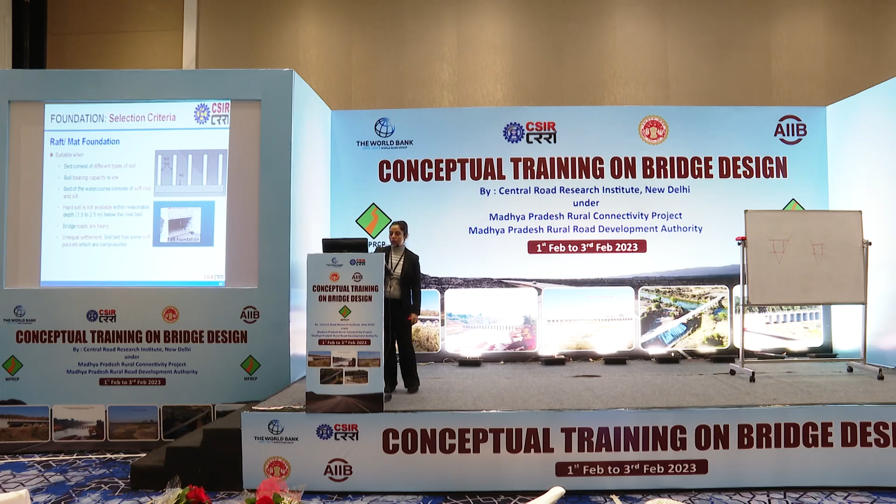Raft and mat foundation is suitable when the bed consists of different types of soils and the soil bearing capacity is low, or the bed of the watercourse has soft clay or silt. When hard soil is not available within a reasonable depth and bridge loads are heavy, we have to go for raft foundation. It is also expected that there can be unequal settlements.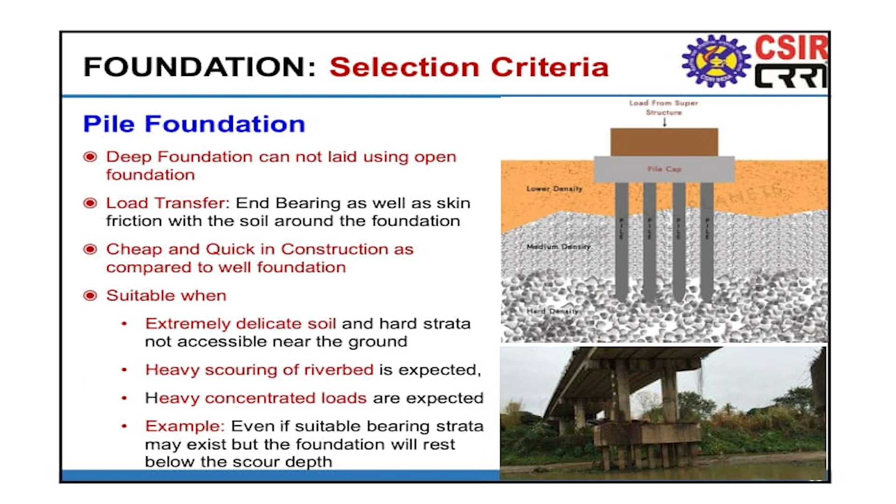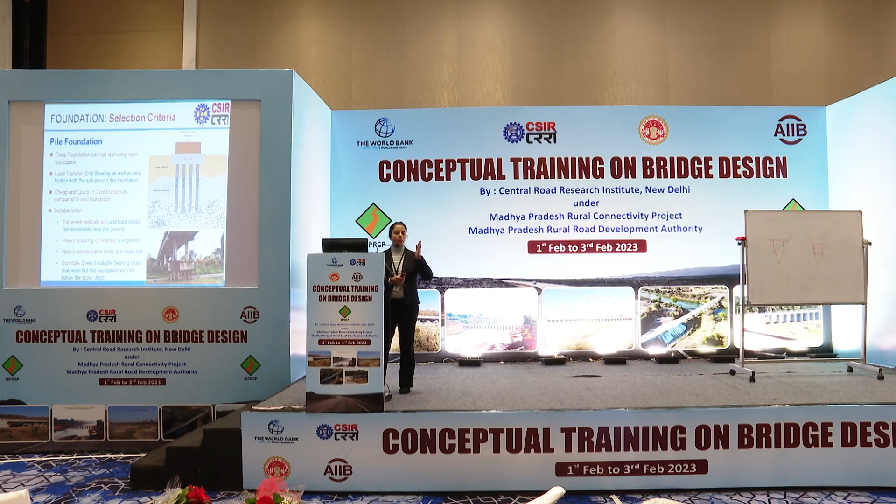Pile foundations: deep foundations cannot be laid using open foundation. The load transfer in deep foundations happens through two actions, end bearing as well as skin friction. Pile foundation is cheap, quick and economical compared to well foundations, and it is suitable when extremely delicate soil is present, when heavy scouring is expected, and when heavy concentrated loads are there.

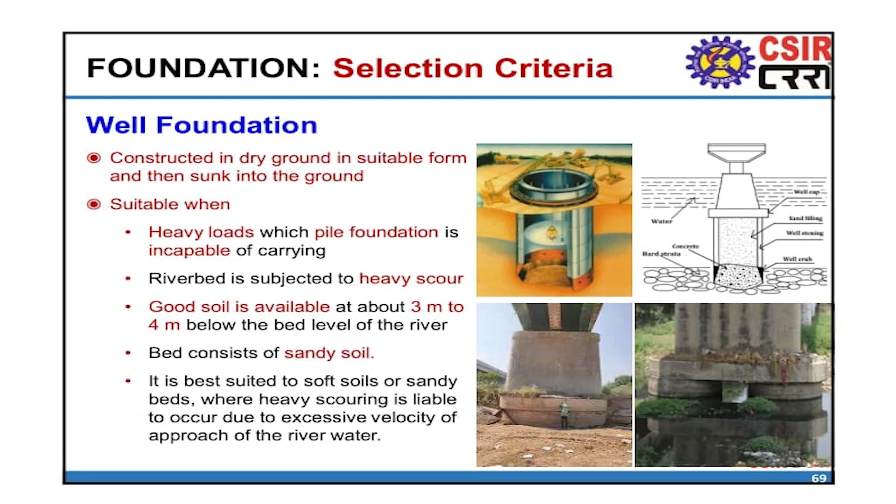Well foundations are suitable for very heavy loads which pile foundation is incapable of carrying. If loads exceed the capacity of pile foundation, go for well foundation. If very high scouring is expected in that area, go for that. And if sandy soil is present, the only option left is the well foundation.

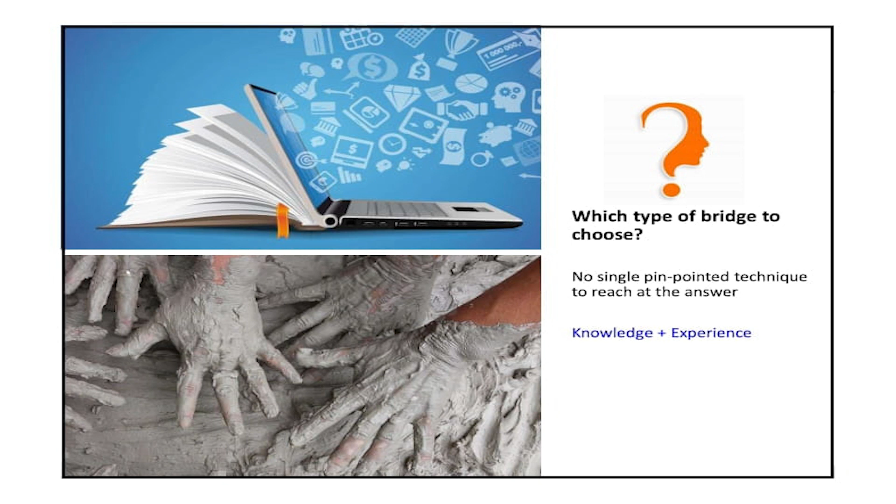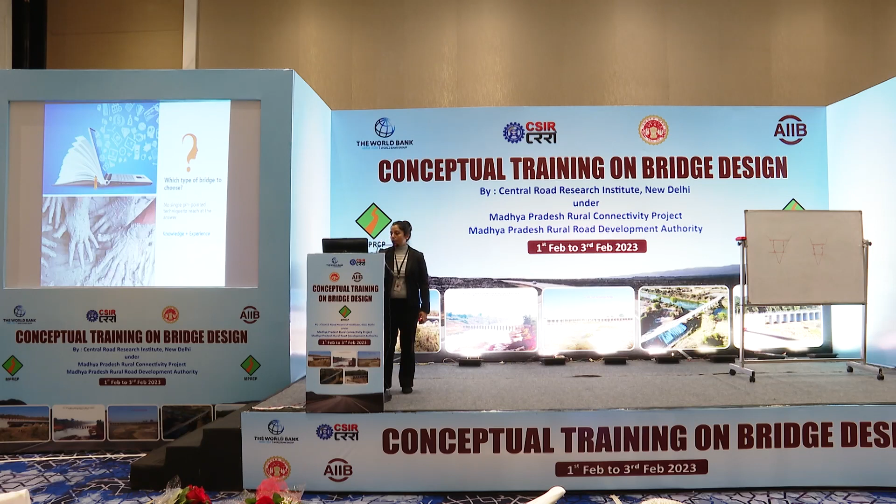So I will end this presentation by saying that selecting a type of bridge depends on so many factors. In this lecture I have tried to give you a little knowledge about different factors you can keep in mind, but at the end of the day there is no one pinpointed answer for selecting a type of bridge. It all depends on your knowledge and experience. You have to get your hands dirty, experience different designs, see different types, and iterate to get an economical type of bridge. So knowledge and experience will actually help you decide what type of bridge to choose. Thank you very much.

And if there are any questions.

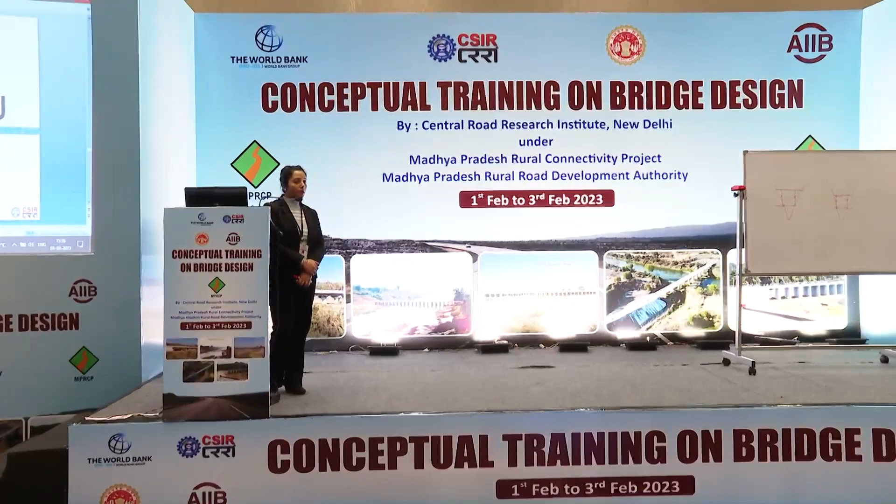Question: Ma'am, when should we take an arch bridge or when should we take a girder bridge, in which condition? Answer: Arch bridges, compared with girder bridges, are suitable for longer spans, so if you choose an arch bridge you can go for a longer span. For girder bridges, as discussed in the lecture, there are different factors including span length, which is always one criterion. Also the type of girder matters, whether it's PSC, plate, or another type, and the span length will vary for all those different types accordingly.

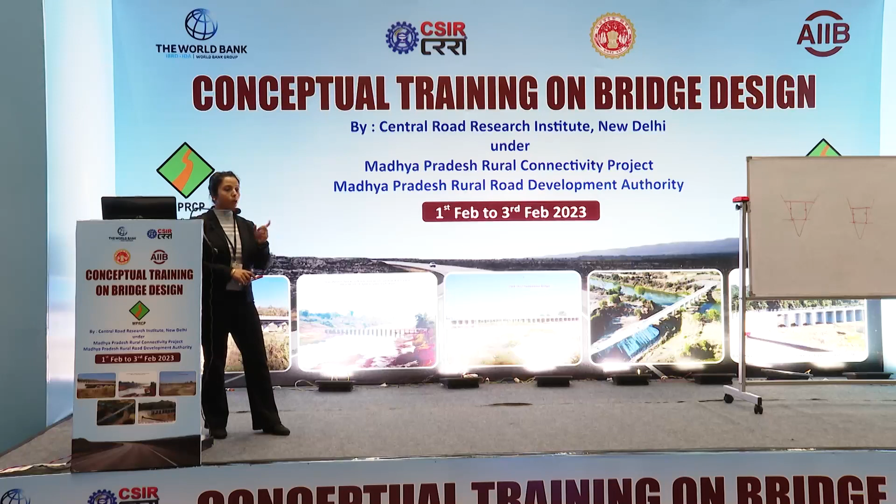Thank you very much.